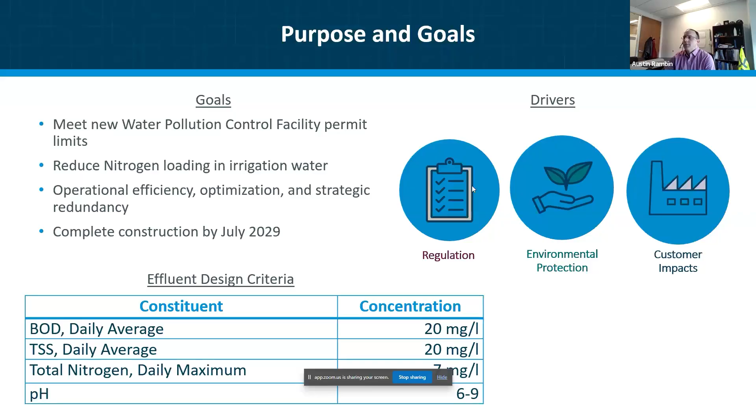So some of the drivers for this project, obviously there are several, but regulation is a big one, environmental protection, and then minimizing impacts to the port's customers. So ultimately, the effluent design criteria we are targeting is a maximum concentration for BOD and TSS of 20 milligrams per liter, 7 milligrams per liter for total nitrogen, and then having the effluent be in a range of 6 to 9 on the pH scale. So now to dive into the value engineering early efforts, I'm going to hand it over to Frederick.

Yeah, thank you for that, Austin. So, really recapping on the timeline of the project. Design was started in 2021, 2022. Final design was completed in 2024, and the project was bid. In the summer of 2024, those results identified the overrun of the project budget and the project cost. So early last summer, we did some initial quick value engineering cost savings, following both regulatory and industry best practices for approaches for some value engineering savings.

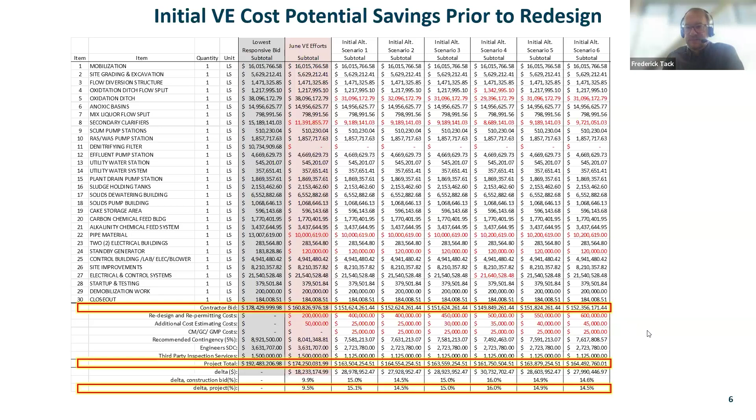We focused on what the best value engineering approaches were, and also discussed those with DEQ prior to proceeding with any of those changes. So we workshopped with the contractor and those bidders to provide the best input to manage cost during construction. Also reviewed approaches with DEQ for regulatory approval.

So one of the main approaches was to reduce the peak flow and loading to the plant. The more capacity, the more flexibility and range the plant needs, the more physical infrastructure that's needed. So the best way to cut down on the highest cost of the project, which is the physical infrastructure, is to reduce that peak flow and loading. That approach would manage peak flow conditions in the existing infrastructure, so the existing anaerobic digesters.

Another key value engineering item was omitting the denitrification filter. Denitrification can still happen, and we can still meet the regulatory goals in the oxidation ditches, which is the main secondary treatment process. The denitrification filters were really a polishing step and kind of belt and suspenders. So we identified the ability to remove that from the project. There were some opportunities to simplify the influent flow diversion, how things connect, rather than building structures, keeping it in pipes and keeping it underground.

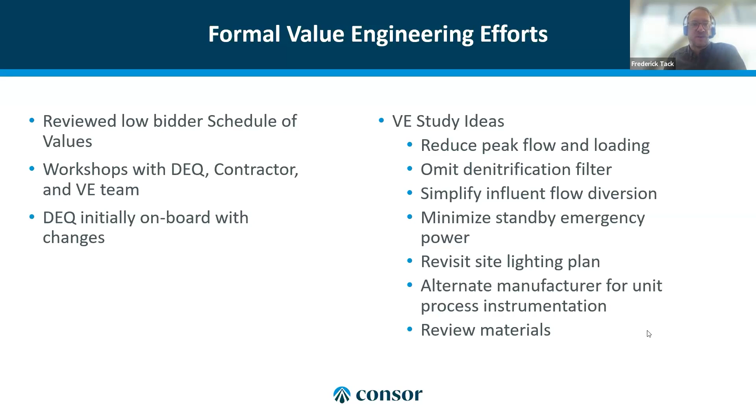Additionally, we reviewed some different materials and processes that could still meet the durability requirements, but that might be able to return cost savings. Austin, next slide.

So I want to talk about some of those just to understand what this means. First we talked about attenuating the peak flow, or managing those peak flow and loading. Using the existing anaerobic digesters allows us to reduce the overall capacity of the plant. And it also allows for construction of additional trains or processes in the future. So we still have the space planning for the ability to expand if needed, but managing those peak flows reduces the cost. Austin, next slide.

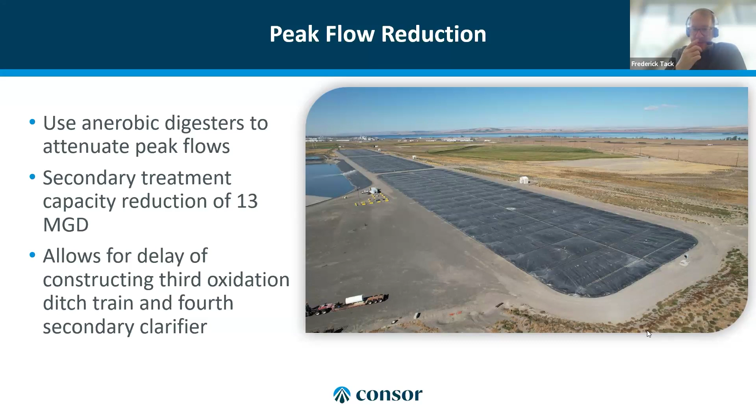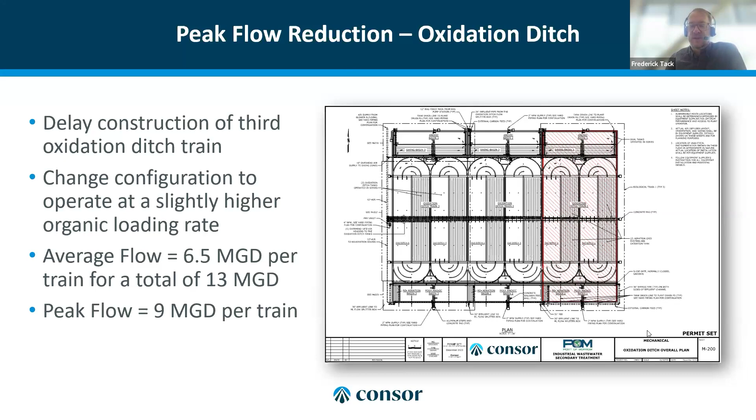So here in this picture, you see an image. These are the oxidation ditches. This is the main secondary treatment process where 3 trains were initially planned and designed, where 2 trains were defined as duty and the third as standby, but also that could manage the peak flow conditions. By removing that peak flow requirement, we were able to remove one of those oxidation ditches. Therefore, we could manage the average flow in any one of the 2 remaining ditches at any time, and change the approach to that train so that each train has that ability to flex and still handle some peaking condition, just not the overall infrastructure that's required for the third. Next slide, Austin.

After secondary treatment, we have secondary clarification, which is a final polishing step in this tertiary treatment. Originally, the plan was to have 4 secondary clarifiers with room for a 5th. Therefore, 3 clarifiers could be in service and 1 out of service. Being able to remove that peak flow condition allowed us to remove the 4th clarifier and then change the approach to the remaining 3 secondary clarifiers. As you'll see, the theme here: we reduced the amount of physical infrastructure and equipment at the oxidation ditches by 1/3. By removing one of these secondary clarifiers, that reduced that infrastructure by 1/4. Next slide, Austin.

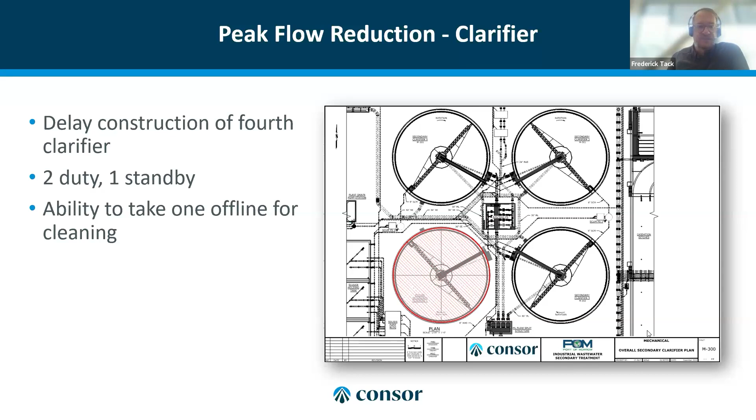Other considerations, again, not just for the peak flow conditions, but optimizing how these systems were used. There are chemicals that are used in this process. Alkalinity is used to manage the overall treatment process, and nitrification and denitrification. By removing one of these silos, which holds lime for this process of adding alkalinity, it cuts the cost of that facility in half, and therefore we're also able to reduce the mechanical systems, so the carbon feed systems that would feed that into the treatment process.

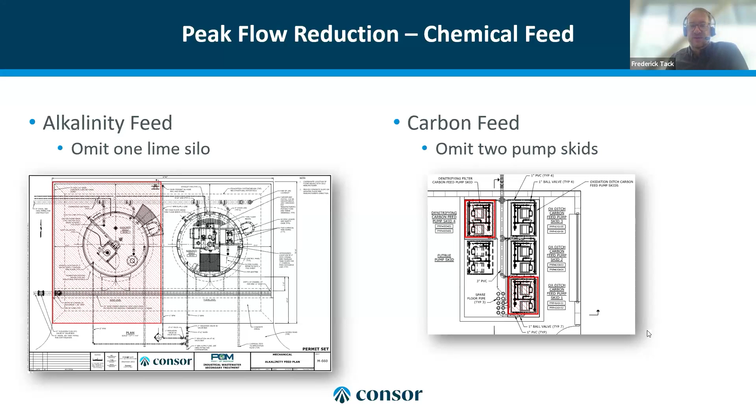So a systematic approach of understanding an overall value engineering concept, and then kind of weaving our way through the design and identifying what features can be omitted and or optimized while still meeting the overall performance requirements. Next slide.

The denitrification filter, again, this was a feature to help with denitrification. We were able to revisit partially by removing the peak flow conditions, but also reevaluating the oxidation ditches, able to remove that tertiary filter. This is a large piece of hardened infrastructure, very big concrete filters with media, and a lot of large piping to that as well.

Being able to remove that doesn't completely remove the cost around that, as that infrastructure was combined with a plant pump station and a clear well that needed to be redesigned. But again, we were able to go back and verify through our own process modeling and calculations and get warranty from the equipment manufacturers that we can still meet our performance and our nitrogen limits without the denitrifying filter.

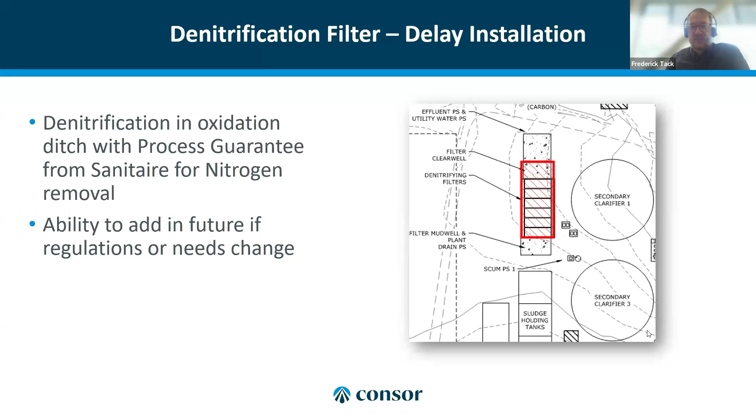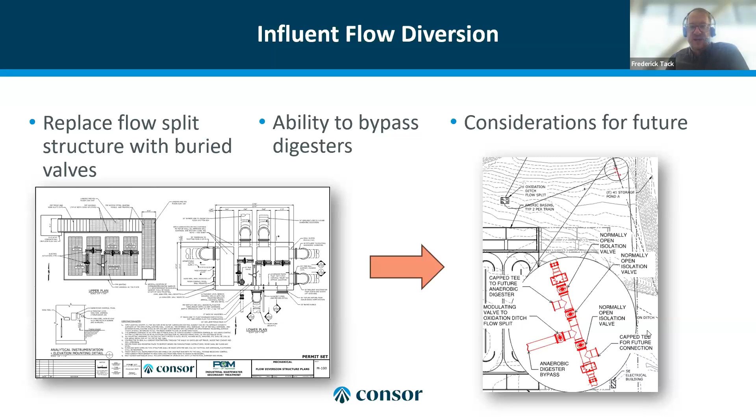This still provides the full ability, and we were able to actually even improve the ability to bypass and manage flow with this system. Austin, would you maybe like to review this and continue?

Sure. Thanks, Frederick. So some other alternatives we looked at, we already mentioned the first one, the corrosion control system for the influent flow split. We'll get into a little more detail on that with a design update. But basically, the effluent from the anaerobic digesters has high levels of hydrogen sulfide, which will over time deteriorate the flow split structure, concrete, and any metal that's in there. So we looked at adding an active odor control to that flow split structure, basically to extend its life. And Chad and team are scheduling an upcoming ozone pilot to test out some technology so we can make sure the design is dialed in.

Other items we looked at were using precast vaults for various structures, one being the plant drain pump station. It was actually too large to pencil out. It's actually cheaper to make it cast in place. So we checked that box. We looked at some material changes, including the process piping materials and various building materials.

For the site work, we revisited the site-wide gravel and stabilization. We had about 10 acres of gravel going into the site, and looking at that, it was decided that we would just provide gravel stabilization for the access drive lanes. We also looked at revising the lighting layout and the products, mainly the light poles, in coordination with the contractor on what was coming in cheaper cost-wise, and also maintenance considerations for the port staff.

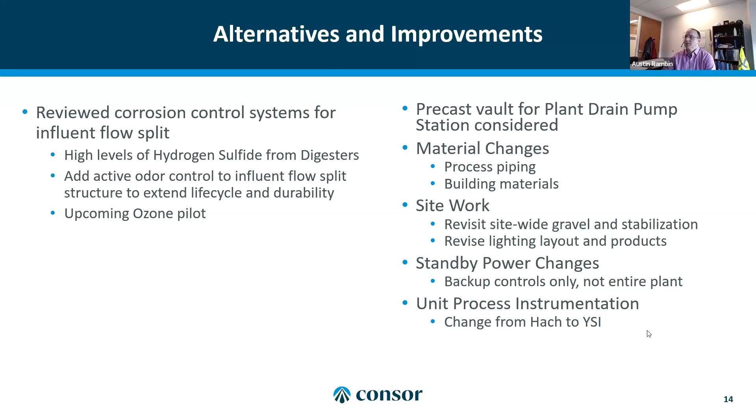And as previously mentioned, we took a look at the standby emergency power requirements and decided to back up the controls only and not the entire plant. So giant generators have gotten omitted from the project, and we're going with a couple smaller ones. And also previously mentioned is the unit process instrumentation, changing from Hach to YSI, which is the vendor's preferred brand, brought us a lot of savings. So now I'll give it back over to you, Frederick, for the design update.

Thanks, Austin. If you could just advance to the next slide. So an overview of what we discussed on those value engineering changes. So all those things that were considered were then pushed into design. So we coordinated with the port team and started those redesign efforts in mid-fall of last year after quantifying the value of that savings and coordinating and discussing that with DEQ as well.

So the items in the kind of peach or pink color there are key items that were removed. We discussed there that of removing one of the oxidation ditches, significant savings there. One of the secondary clarifiers, the denitrification filter, one of the standby power generators, and then one of the chemical feed systems. Up at the top right, we show that color also over the flow diversion structure. That was really just changed to a below ground feature. But we also added and improved some items.

So one of the items that we were able to improve was the oxidation ditch flow split. So that's the main point where flow is diverted to these oxidation ditches. That's where the most corrosive atmosphere is, right, where a lot of the corrosive materials are released from solution. And that's where we identified the need to improve the durability and life cycle of that. This is a key piece of infrastructure that needs to last. And initially it was taken just to have a passive condition where that odor would be released.

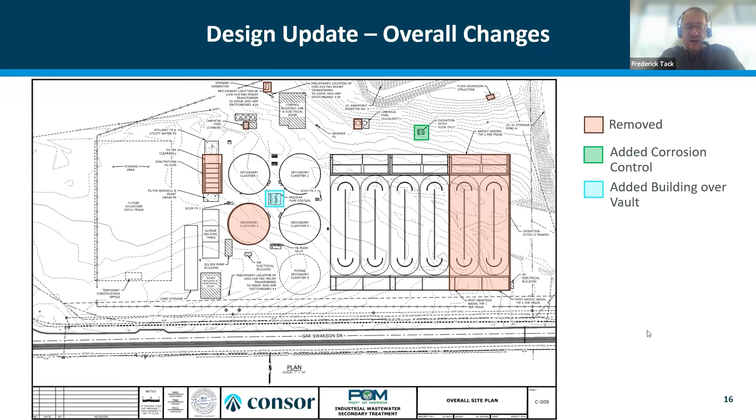This was a pump station that was planned as a vault, so below grade, had some long-term higher cost to operate and maintain, and some limitations on the ease of operability and really influencing a higher cost of operations. Austin, next slide.

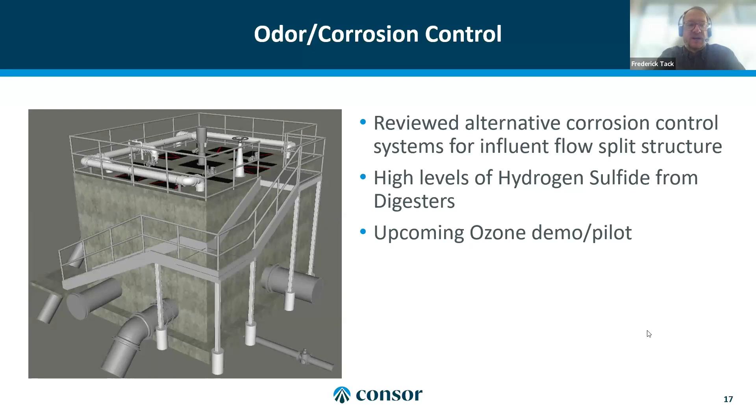So first with that influent splitter box. This is just a snippet from the model of the update to this. In short, we're putting a top on this box to simplify it, and we're adding some piping to withdraw the odorous air that we will actively treat. As Austin mentioned, we're currently coordinating a pilot where we're testing some ozone equipment where we use ozone to knock down and mitigate that high corrosive atmosphere. Otherwise, we have two other technology alternatives, and that will really extend the life cycle of this process well beyond the initial design. Next slide.

So this is that building I mentioned, the WAS-RAS pump station. Again, this is a snippet from the model of what's currently planned for design. Originally, this vault or this feature had a top on it. Basically, where the floor is at that mezzanine level was just a top where operators would open a hatch and climb down a ladder to get in there to operate. And then there'd also be hatches for lifting pumps and motors out of there.

By actually turning this into a building, we're able to make a safer environment. And we're also able to reduce the long-term cost to operate by providing better access to these features and reducing the overall construction cost or the overall construction schedule for this as well, and simplifying the method of construction.

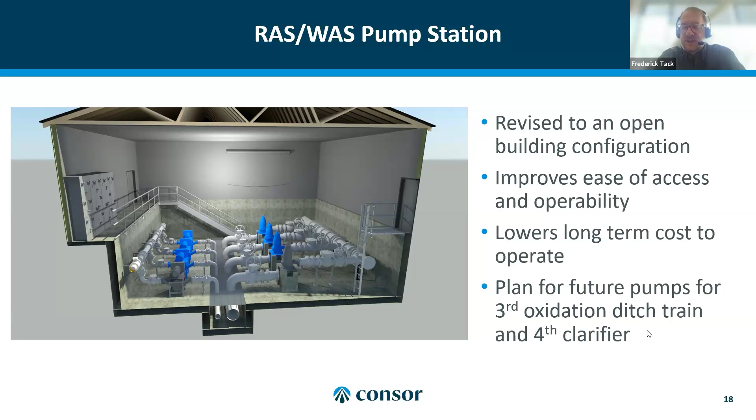Most of the buildings proposed on this site are tilt-up concrete. This building is being planned with brick and mortar walls with a truss roof as well. That will improve the overall construction schedule, but it does mix some of the construction materials as well. Next slide.

Austin, you want to talk about next steps and schedule? Sure thing. So here we have our timeline. I'll just kind of walk everyone through where we've been and where we're going. So 2018 to 2022 was initial planning. Consor got on board in late 2022 and worked on the design. We finished the design in March 2024 and went out to bid.

Open bids in June 2024, and the low bidder was $178 million. And this meant that the project was over budget, and we had to rethink elements and go into the value engineering phase. So we had several workshops with DEQ, the low bid contractor, and port staff. We went through the alternatives analysis, like we briefly mentioned earlier. And this study is required for state-funded treatment plant projects that are over $10 million. So it's a requirement from the SRF program.

So now we're about 85% through the redesign effort. The technical specifications and sub-discipline designs are remaining. A little bit of work left to do on those. We're targeting completion next month for submission to DEQ for permitting, review, and approval in the April-May timeframe, and then negotiate, rebid in the May and June timeframe.

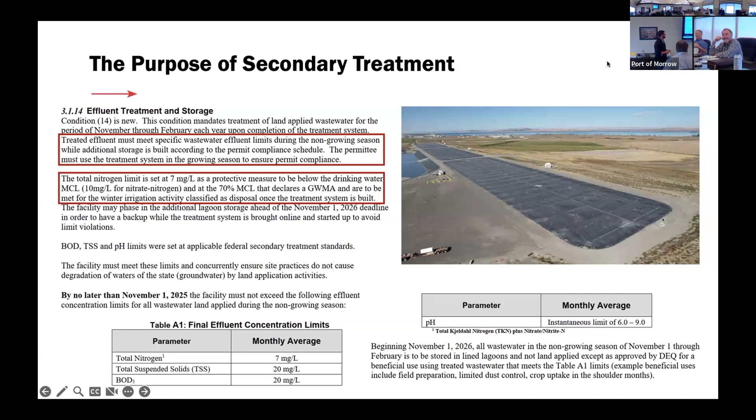But also don't smack me with it. So I think that's the key takeaway for that piece of it. So the next part of this is what I want to highlight. We're talking about groundwater protection and the purpose of treatment.

So right now with the current secondary treatment system, I want to highlight what water benefit water reuse provides. In 2023, we have to compile all the data that gets submitted to the state. So we went back and looked at how much of the nitrogen that was land applied in the port system was reuse water nitrogen versus commercial fertilizer. The chart on the right shows in light green, the big piece of the pie, 1.5 million pounds of nitrogen used by the farms came from reuse nitrogen.

The next largest was about 144,000 pounds of nitrogen from irrigation water, meaning fresh water that just has nitrate in it. And only 78,000 pounds came from commercial fertilizer. Now, this is based on, back in 2023, I think we were using the 70% TKN rule. I'll get into that later. We don't need to jump on that too much right at this point.

But the key here is that if we take the current level from about 90 milligrams per liter of total nitrogen down to 7, notwithstanding what we talked about earlier about maybe a different level, that 1.5 million pounds per year is going to shift over to commercial fertilizer. Because the farmers still have to grow a crop that needs nitrogen. So whether it comes from reuse water or commercial doesn't really matter. We still have to get a certain amount, and the groundwater doesn't distinguish between reuse water and commercial.

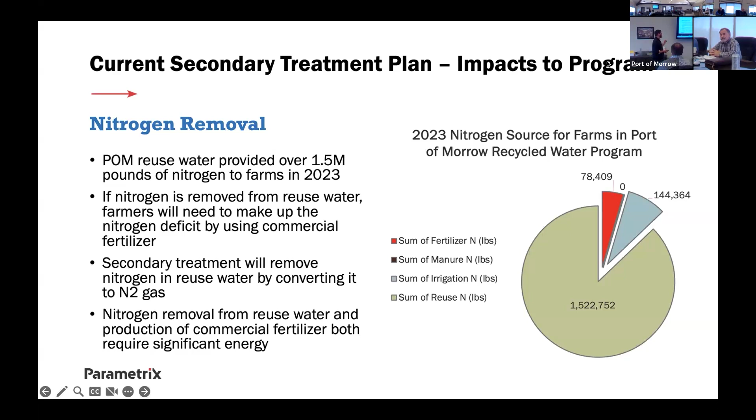There might be some differences. I'm not versed in how well it moves or anything. You guys maybe have more information on that, but in terms of the total amount, it won't change. So that's the point. If we take it out of reuse water, it's going to be made up by commercial. The secondary treatment will remove that nitrogen from reuse water and convert it to nitrogen gas, which Frederick already pointed out. And finally, nitrogen removal from reuse water and production of commercial fertilizer are both going to take significant energy.

So this is the diagram I was referring to. I know the text is small, but on the left-hand side, here's what we will be doing with secondary treatment. The projection we had, I think based on some of the port's numbers, is 16 million kilowatt hours of electricity to operate that secondary treatment system. That'll be taking all that nitrogen and off-gassing it to N2. Now, okay, yeah, you're right.

That nitrogen, organic nitrogen, nitrate, and ammonia, will no longer go to the farm. So instead, this crop still needs the same amount of nitrogen no matter where it comes from. Nitrogen gas is going to be pulled in from the atmosphere in a commercial fertilizer plant, and the Haber-Bosch process is going to be used to convert that to ammonium. That 1.5 million pounds of nitrogen fertilizer is going to require 6 million to 8 million kilowatt hours of electricity. It's converted back into urea or ammonium, and then land applied the same way.

So the total energy cost to remove all that nitrogen, take that gas somewhere else in the world, convert it back into fertilizer, and then land apply it is equivalent to about 2,150 homes per year. Part of what I've been trying to get at is that these inefficiencies don't just represent a cost in terms of the farmers paying for commercial fertilizer. It's also the carbon impact of having to buy it somewhere else, and all these other things we're not quantifying, like the environmental impacts upstream.

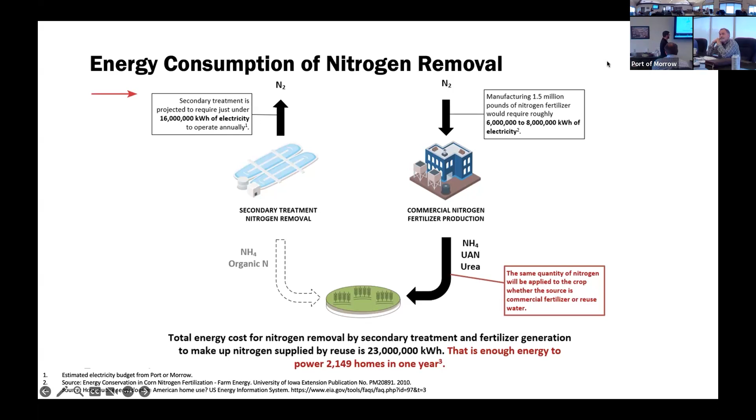I will say, and I appreciate Justin and Consor highlighting that treatment does provide flexibility. That's why I was trying to distinguish between nitrogen treatment versus BOD, TSS, some of these other things that we need to do, but where that nitrogen limit is, is what I'm trying to highlight. So the next piece of this is the secondary treatment won't solve agronomic rates.

And again, for everyone, agronomic rate is simply, well, we'll disagree on the way we define it. So I think farmers, you guys would say agronomic rate is the amount that we apply relative to what the crop needs, right? So it's essentially a medicine. We say, you're my patient. I think you need this much to be healthy. Here's your prescription dose for your agronomic rate.

DEQ, Justin, I think the way you define it is, we tell you a maximum threshold of nitrogen that can be applied to a given crop. And the assumption there is that anything below that would be protective of groundwater. So it's effectively a best management practice or a ceiling limit, and you can work with anything below it, but not above that. So with that, we have to agree on what that should be set at. Is it 100 pounds? Is it 120 pounds?

What I was trying to get at earlier is a small change from 100 pounds to 130 pounds might have a big impact on how Jake operates his farm and what he's able to produce. And Justin, I think you had a great response on this. My concern is, can we measure that change? Can we say, okay, we reduced it from 130 down to 100 to be protective of groundwater? Are we able to look at groundwater data and say, yep, we saw it go down? So I'll leave that open. I think there's probably a lot of feedback on whether that's true or not.

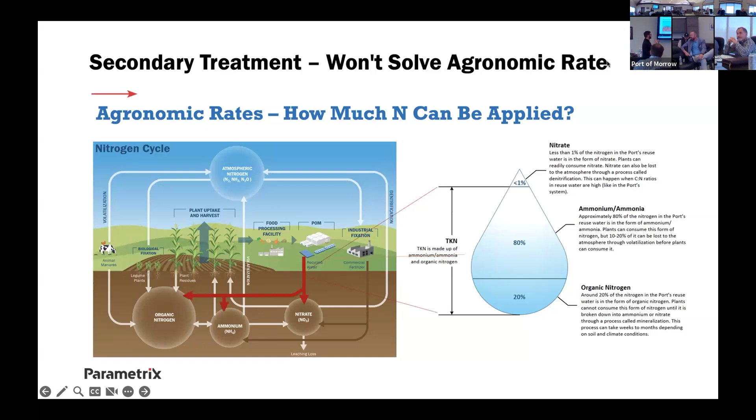And so the reason I'm bringing this up, my first point, is disagreement on the method to calculate. Even if the treatment system removes it to a certain level, there's still disagreement in the science, not just DEQ, farmers, and maybe the academic community, on when we apply that 100 pounds of nitrogen from the treatment system, how much of it is actually plant available. And if we can't agree on that, then it's hard to set a benchmark of how high it should be. And therefore, it's hard to calculate what the treatment target should be from the water treatment system, because we don't know how much the plants across the whole program can take up.

So this is something we're working on right now. Justin brought up, we're working on pilot studies where we're submitting formal plans. Jake will tweak 10 or 30 pounds of nitrogen. Then we have all the sampling that takes place. So we are working towards that. But my point is just that when Consor is asking these questions about capacity, there's a couple other downstream things we have to solve, because otherwise it's hard to justify or quantify what the effort needs to be.

And I already brought this up, but to me it seems unclear how the permit-required monitoring, meaning soil sampling, tissue, and others, can be used to evaluate how effective those current agronomic rates are. And what I was getting at there is, again, if we change it from 100 to 130, the pilot studies, Justin, I agree, are great. I think they're the best path forward we have right now.

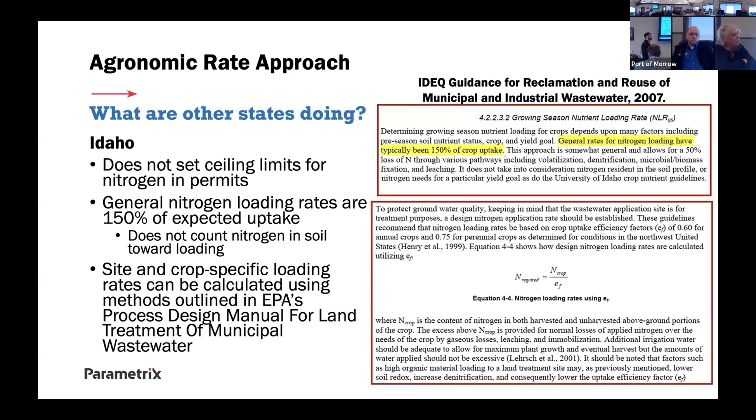So my point is there are some technical approaches here that might be able to be included that could help resolve these. I'm not saying any of these are a silver bullet, or we should just adopt what other states do. I'm just saying with DEQ relooking at their program, I think there's an opportunity for a lot of input to see what works, what's protective of the environment, and what can be managed at the field level more effectively.

Now, there's an issue with this, and I'll just say it up front, Jake pointed this out to me. We can't think of the crop system as if we can continuously supply water and nitrogen the whole time, because a lot of the nitrogen uptake happens at specific times. Anyone who's a farmer knows this. It's more like an Amazon delivery system, where in March, April, or whenever the time permits, you need to deliver packages of nitrogen and water out there.

Then you need water for the dry season. You're going to need a lot of water the rest of the year, but the nitrogen is sometimes packets. And what we need to make sure is that the nitrogen in the water is low enough so that you can put that water out there and meet the hydraulic demand, but you still need to send packets of nitrogen out every once in a while. The little Amazon packages, right?

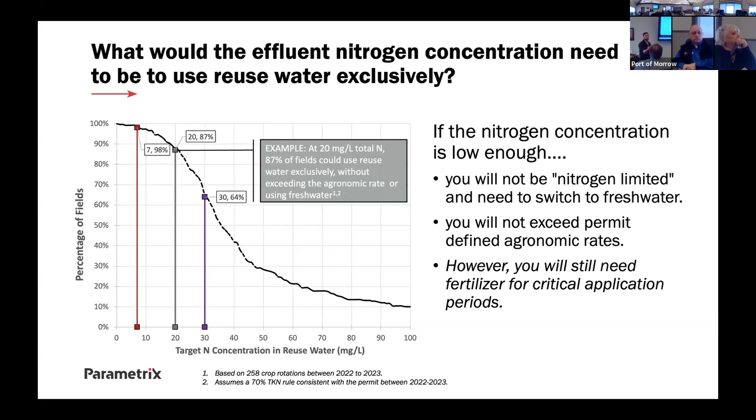Now, I made this before I asked all those questions to Jacob and your team, and the reason I was asking about flexibility is what I'm hearing from you guys is that the secondary treatment system can be built to operate down to 7. But if you dial back your oxygen, let that BOD go from 20 up to, let's say, 100 or 500, whatever the farmers say we need, and nitrogen doesn't need to be down to 7, it needs to be at 30 based on compliance with agronomic rates, there might be some OpEx savings, but maybe not capital. So I'll leave it there for any other questions, but I would just say that you guys have also changed my opinion from when I walked in the door.

It's kind of so. Yep. I'm here. Can you repeat the question, please?

Well, I was just saying, I think I gathered from the questions earlier, in the last chart that I shared, I was trying to highlight that the nitrogen target and potentially the BOD target could be movable, but what I heard from you guys is the technology wouldn't change and the size and CapEx wouldn't change, but potentially the OpEx and what you operate that to remove down to could be adjusted. Yeah, that's correct. It would be less air, less chemicals, less OpEx, but the same hydraulic footprint, if you will, to be able to pass those flows.